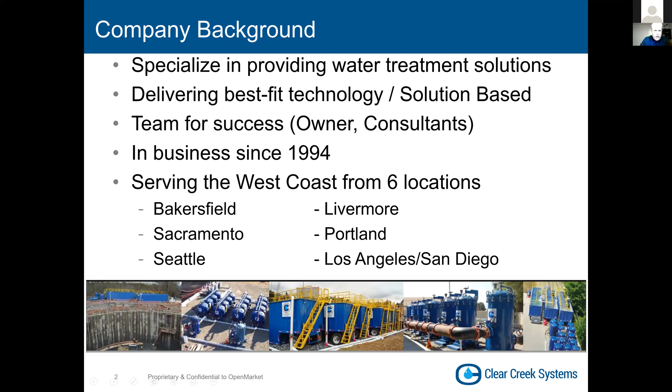One thing that I should say is that when I talk about we, it's not necessarily Clear Creek Systems. When I talk about we during this presentation, it's going to be we as stormwater professionals, okay? So I'll get going. Today's presentation will be focusing on the design and implementation of an industrial stormwater treatment system. It'll be a top-down review of how we as professionals approach these tasks.

We'll touch on the following aspects: how to assess the site, including design and layout of the existing facility and future treatment, identifying any contaminants of concern, and we also will talk about how to treat stormwater efficiently and most economically. We'll talk about how we prove that out through pilot or bench testing. And then finally, I will touch on installation and post-installation considerations. That sound good?

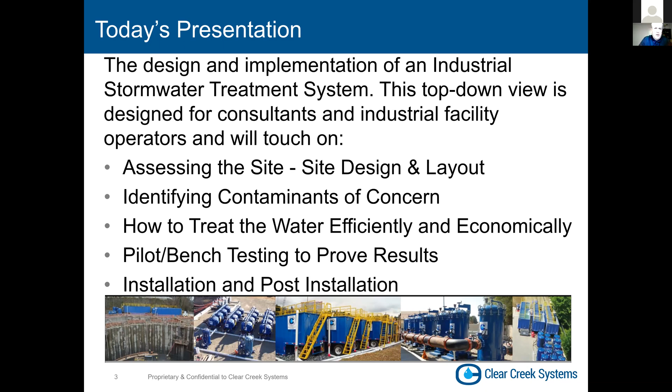So the typical industrial stormwater approach, typical usually means all the time, but every site's going to be different. But they'll consist of the following items. We'll want to meet with the client and their engineer and consultant. Some facilities elect to go it alone, and some have engineers or environmental consultants that assist them through the process. Oftentimes there could be some legal matters involved, and everybody's needs need to be met in that arena.

So once we have the principals, we'll review any site information that we have. We'll take samples, conduct some bench testing, move on to preparing the budget, fabricate and install the equipment if we find that that's an economical way to approach the task. And then we'll also follow up with any support operations that may be needed in the future.

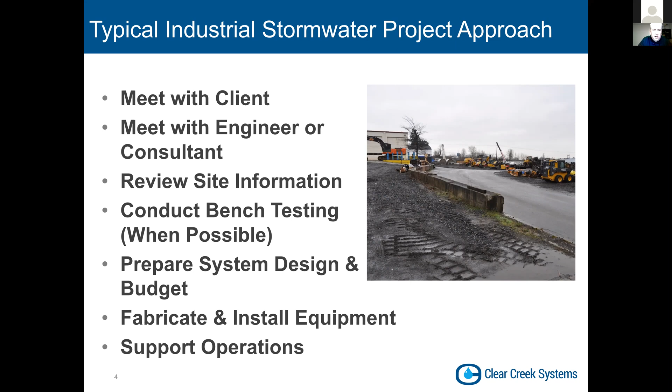Determining the best treatment solution for a facility is a process. There are a number of treatment options available, some less expensive than others. We find that we can arrive at the best approach by conducting the bench and pilot testing, and I'll go into that a little bit later. Follow through with the capital cost and O&M and the best fit technologies. But part of all that is having a good team, and that means our vendors, clients' engineers, their consultants, and facility management is key.

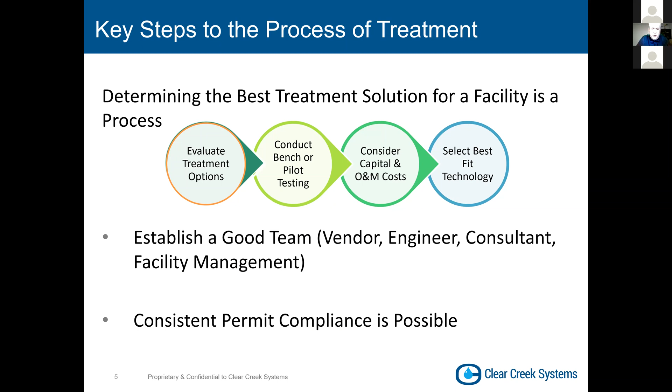We want to know going in, we want everybody to know that consistent permit compliance is possible. It's not something that you hope for. It's something you should be able to depend on.

So the project preparation process will include a site walk, where we go through the site and look at actual conditions, look at housekeeping, how that may be playing a current role. Oftentimes housekeeping has already been picked up by the time we've been called in. BMPs are in place, parking lots are being swept, metal has been put under cover. There's a number of BMPs that can be followed.

So we'll take a look at that, and we'll attempt to capture a sample of the stormwater or simulate a sample with fresh water in a problem area. From there, we'll create a site pollutant portfolio, perform bench testing, analyze percent reductions after our bench tests, and analyze all other obtained information, design and price a system. And I'll be going through each one of these items in the following slides. First, perform site walk, sample capture.

We'll have our technical staff arrive at a facility, meet with the folks there, take that tour, and do an evaluation. We'll look at, again, the existing site conditions, the site pollutant sources. Where's the problem water coming from? And we'll initially look at the feasibility of treatment.

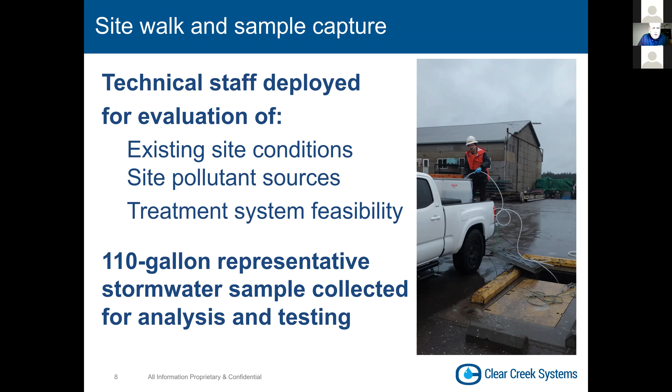Most often, again, we'll try to get 110 gallons worth of representative stormwater. That's like two 55-gallon drums or half a tote. And we'll take that back to our laboratory or a laboratory and do the analysis and testing there. Once we get that laboratory analysis back, we as professionals will create a site pollutant portfolio.

And what we'll be looking at is a whole list of different types of pollutants, and often they're associated with sources. So if we have cloudy water or high turbidity, a lot of times we can look at gravel lots or housekeeping, unswept lots. A lot of things can increase turbidity. We may have issues with pH. That could be affected by a number of different materials.

And then also very, very often we'll see issues with copper and zinc. It's just out there. It's one of those things that a lot of people have to deal with. And then decomposing organic material, anything on site like that, suspended solids. And finally, sometimes there's issues with VOCs and petroleum hydrocarbons and other legacy pollutants.

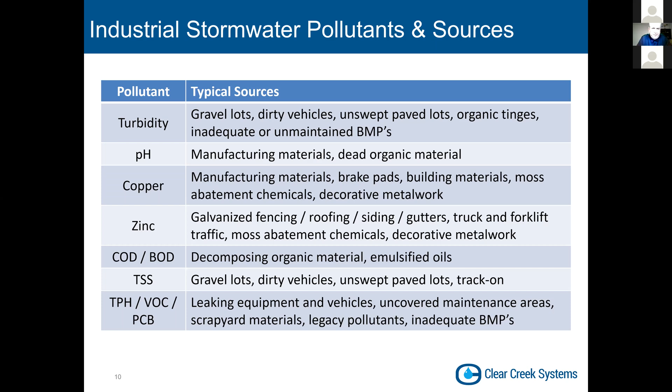So once we complete that task, we're going to have a summary of our pollutants of concern. And when we look at that, we'll be able to put together a unique site portfolio. We'll want to know what are the permitted pollutant levels that we need to stay under, and also what is not permitted. What are you not allowed to discharge from that site?

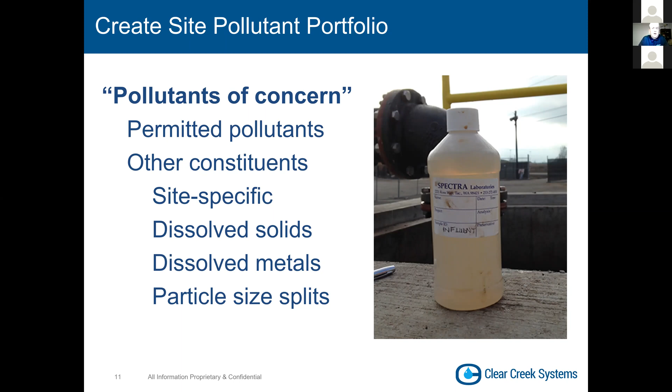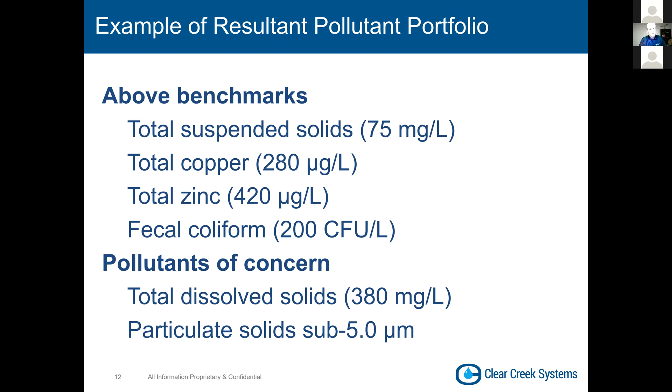This example here with these constituents will kind of follow us through our step-by-step approach. So we'll be able to see how we might treat for these on a theoretical site. Okay. So once we have that together, we'll perform our bench testing. We'll know what the slate of pollutants looks like by now, and we have in the industry some knowledge of how to treat for those. So we'll perform the bench testing and the pilot testing as needed.

Things we'll look to do is remove the solids load. So for any solids in the groundwater or the stormwater, we'll test a mix of mechanical filtration techniques, and that might include sand filters or mixed media filters. We might need to add some chemical treatment and see how that reacts with that particular site's stormwater. Chemical is a scary word, but coagulants and flocculants aren't, so we'll typically use those words instead. I'll talk more about coagulants and flocculants in the coming slides.

Now, often we need to use a combination of the two, both chemical and mechanical filtration. That won't remove everything oftentimes, though, unfortunately, and we need to remove ultrafine and dissolved loading from the stormwater. Usually this is stuff you can't see in the water. You could have reasonably clear water and still have some issues. So if that's the case, we typically will look towards adsorptive media, which can include a number of different medias. Most people are familiar with carbon. We use that to filter our drinking water, for example.

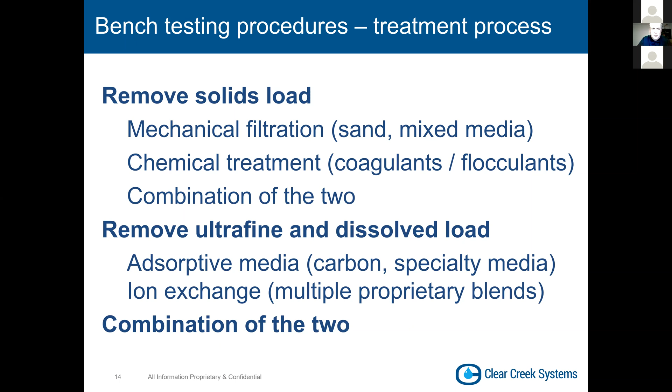We'll take two approaches when we do our bench testing, and folks will usually want to do some qualitative testing. That would include jar testing, where we evaluate chemical treatment and determine the dose rates of any flocculants or coagulants that we might need to add to your system. The qualitative is visual results only. We would be looking for clear water at that point.

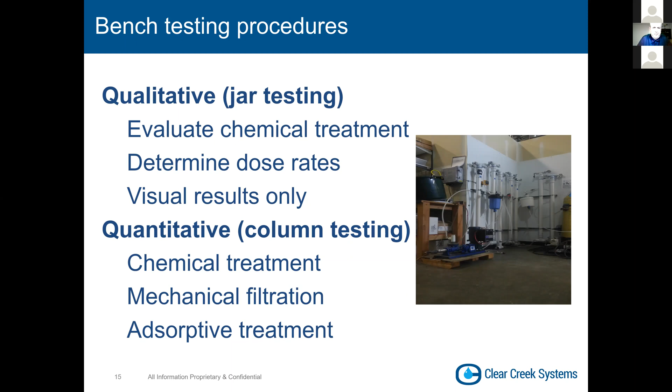And then we'll also do some quantitative column testing, where we actually target the pollutants we know, with solutions for each one of them. That includes things like chemical treatment, mechanical filtration, and adsorptive treatment. Well, we talked about the chemical treatment, and I'm going to start calling it flocculant, or there's different types of flocs. Chitosan might be one of them. There are a number of different polymers that can be used.

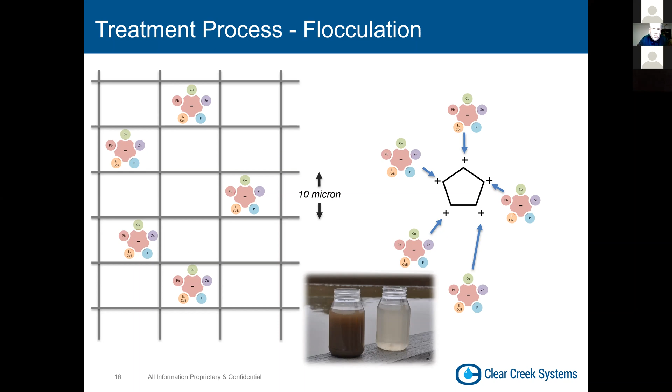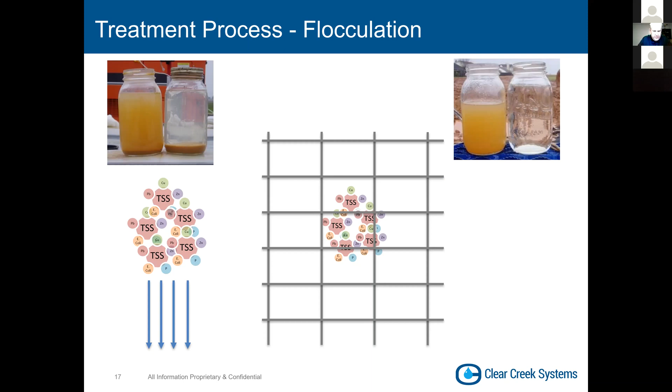Adsorptive media operates a lot differently, actually. The adsorbent media attracts particles as well, but it uses a lot of different forces, van der Waals, capillary action. There's multiple different ways it works, but basically they pull in the particular particles, and they stick to the media or get absorbed into the media, and do not continue on in the process train.

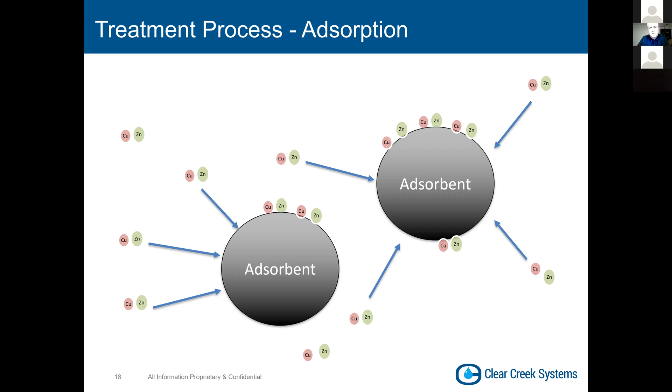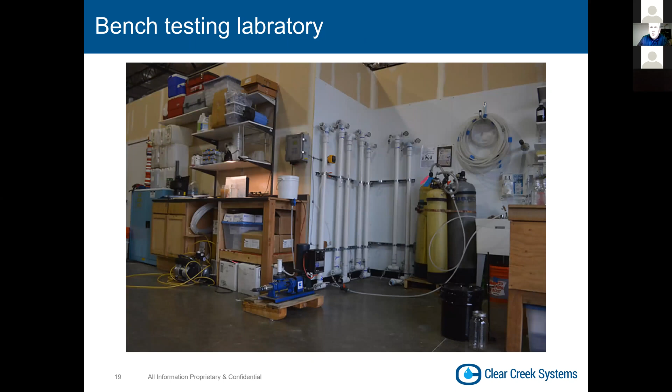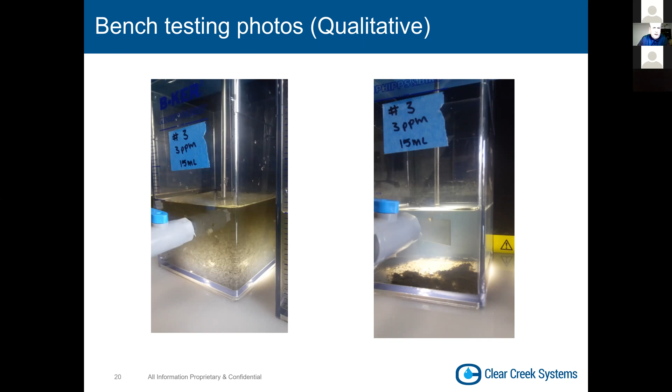So once we finish all that up, we will want to analyze how well we did. This is good data for consultants and anybody concerned with how the actual site might react with a treatment system. In this case, you'll want to look at the sample ID raw. That's your raw water samples, what we've collected at our site. In this case, there might be some chitosan enhanced sand filtration. That's the flocculant with a sand filter. We can immediately see some reduction in copper, total lead, some zinc, suspended solids, and the coliform.

Now, what's good about that is that you're getting a big hit for the least amount of money. So this site looks pretty good as a candidate for sand filtration with some flocculant. In this case, we had two more lines under that, AM1 and AM2. For our purposes today, we'll consider that adsorptive media number 1 and another selection, adsorptive media number 2. We see that it didn't really have any effect on pH, although it did increase a little bit. Nothing on the NTUs. But we did see some results with AM2 for the copper, and zinc was really good reduction there.

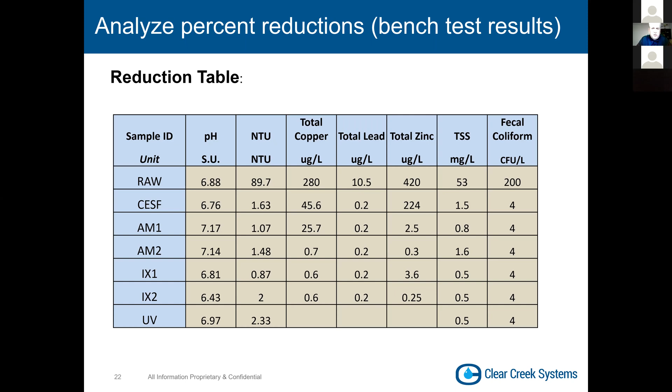So that's just an example of what you might look at after a bench test. We should be able to make some decisions on what we would recommend as professionals to the client on a way to proceed. What's great about this type of thing is that it's defensible, it's repeatable, and oftentimes a third-party laboratory will do the final testing to check these levels. So very pro. So this is just a summary of that sheet.

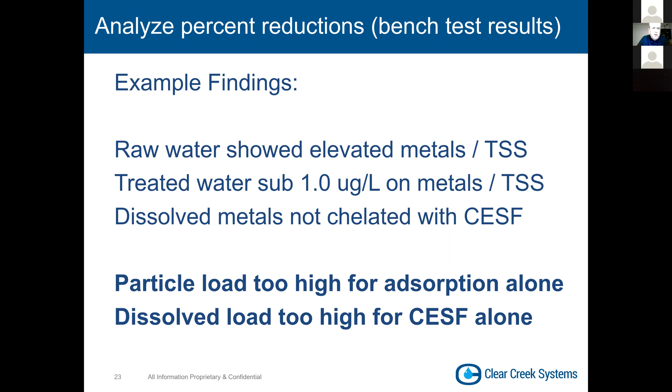We'll be able to draw conclusions based on particulars. And in this case, or well, our example anyway, the particle load was too high for adsorption alone, which means it was dirty water, and dissolved load too high for CESF alone. So I remember I talked about sometimes you need to use a combination of both technologies. This is one of those cases. All right.

Finally, we'll analyze other information we obtained from the facility, and this helps us put together the final plan that we will approach our clients with, along with consultants or engineers if they're part of it. But we want to look at outfalls. We want to know where that water is coming from. Is there drainage off the back end of the site, or coming in from your neighbors? We want to make sure that we're not treating somebody else's stormwater that's running on. The fertilizer plant next door can mess things up. So we'll be looking at things like that and site characteristics.

We'll want to know where this water's going. Is it going right to the gutter? Do we have access to a storm drain? What's going on? We'll look at other things like the dissolved solids and the fecal coliform. Where's that coming from? Can we clean that up? Why are the filters not able to work on this site? Is it because people are driving on them all day long and just pulverizing dirt and gravel?

And lastly, but not least, you want to look at any other characteristics. Is there a new permit being issued by the permitting agency? We want to future-proof our solutions. A customer is going to spend a lot of money potentially on fixing this problem. They don't need to come back 2 or 3 years later and spend more money because somebody decided to enforce some other Clean Water Act or whatever might get changed as time goes on. So a point I would like to make is that the best solution is able to last.

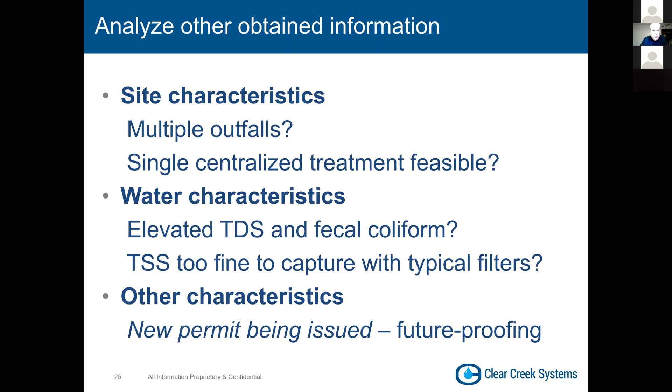Finally, we'll want to design and price out the system. Now, the design's fun, the price isn't always fun. So how we do that, we want to determine the flow rates of the individual drainage basins if there's multiple flows coming. Often that is a direct correlation to site acreage and rainstorm events. So through tables, we can identify a design capability in terms of flow rates. Can we have a centralized treatment system? That means, is this site so big that we cannot combine flows into a single flow? Do we need to have 2 systems?

So sometimes we'll have a facility that spans across a city street. So they have operations on one side of the street, operations on another side of the street. Might need 2 systems. Maybe they can centralize the collection. So we'll talk about that. We'll determine what chemical treatment will best work if needed. That could be chitosan in our previous example. Determine adsorptive media if needed. And that's going to be a mix of organoclay and carbon in our example.

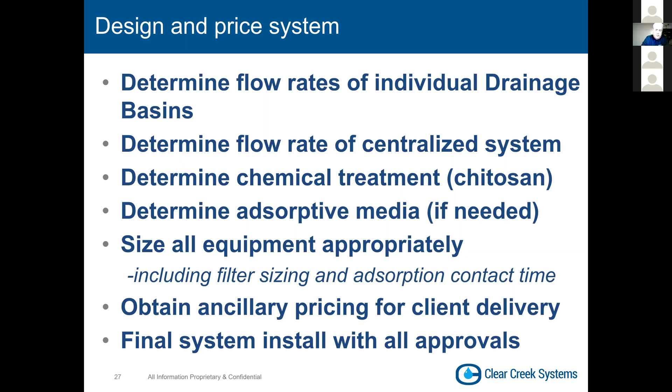And then finally, once all that is approved, there's definitely going to be some additional work done when the system goes in, and so that's what we'd be working towards.

In our example that I'm using today, things that we would probably consider or need to look at: can we use the existing detention basin or stormwater vaults for storage? How much volume is in there? It counts. Need to know. More storage, the less treatment, or the lower treatment volume we'll have to have.

We'll need to pump from the vaults to the centralized treatment, so pumps, and then we'll have to have some conveyance piping. If we have pumps, we'll have to have electrical run over to where the pump is. Can't have trucks running over extension cords, so a lot of times there's some trenching involved.

We'll look at other things, like in this case, we'll have our chitosan pre-treatment ahead of a storage, so we can get some settling. And then from storage through the sand filter, some conveyance piping. And then finally, the adsorption after the sand filter. We saw that work in our example. And then finally, we want a direct discharge to our designated area.

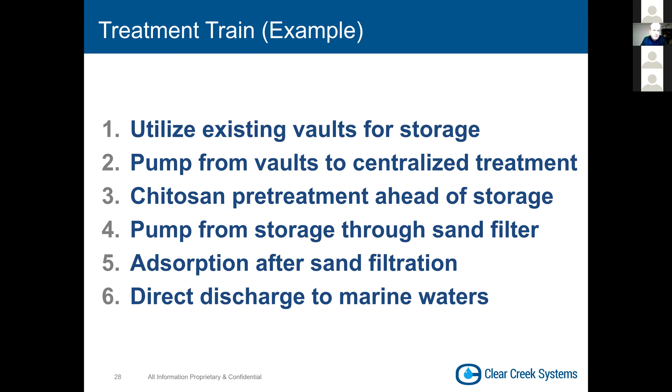Maybe this looks a little bit easier to read, but we'll see our vaults, stormwater vaults or detention basins, pre-treatment with our flocculant. That's that chemical treatment I spoke about. Need some reaction time. It might take several minutes or even more sometimes for the sediments to drop out and clump together. And that needs to be designed in. Finally, that mechanical filtration, that could be the sand filter, and then the adsorptive media, and finally discharge. So that's what it looks like in a line drawing.

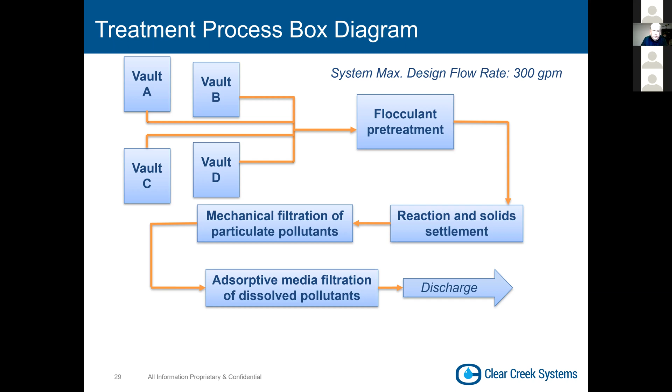You should be able to adapt the footprint to fit in corners or in certain areas. There's no hard and fast footprint requirement, but it needs to be considered as we install. Often we'd like to see everything on a nice pad as well.

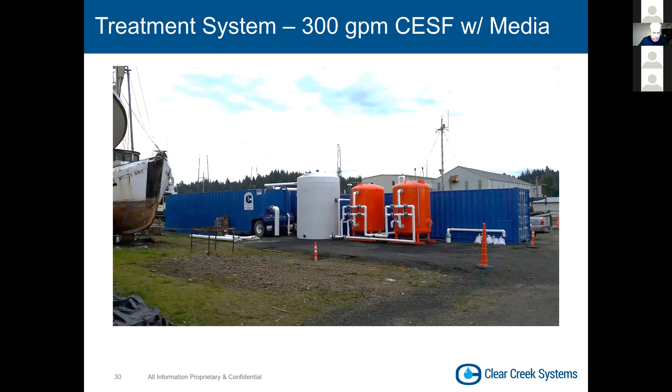Just some additional thoughts as a summary here. So we want to reduce the TSS load, reduce any dissolved metals. We chose a technology in this case because hardness wasn't a problem. We were able to get a small footprint in because we just had a single treatment point, which also results in the lower cost. We feel that based on our bench tests and all the data we've collected, that it's robust, and we've been able to prove the proof of concept through our bench testing.

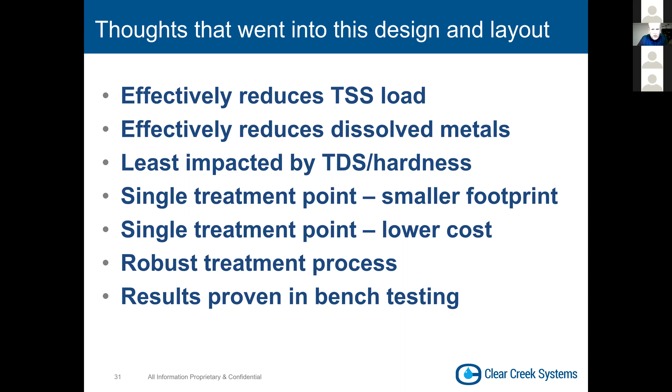So, a couple looks at what that particular system might look like in terms of capital costs. 2016, which seems like forever ago now, just yesterday for me in a way. But prices have gone up since 2016. But back then, what you just saw, these are the numbers.

One thing that needs to be considered is ongoing operation and maintenance. These things are not refrigerators. They do need to be checked on during the stormwater season. The client needs to consider whether they want to train a team to do that themselves, or have a consultant technician do it, or have the equipment provider potentially do that as well. These are all things that need to be determined.

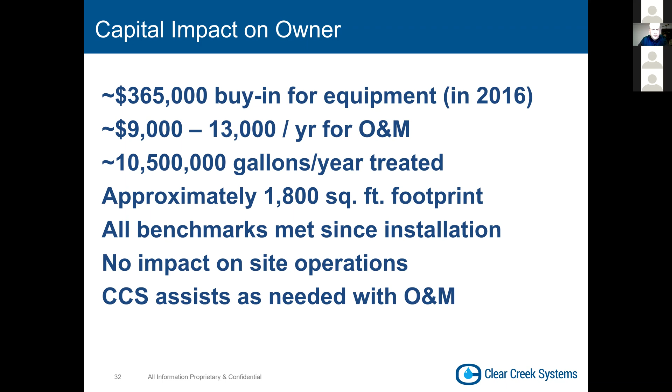And in summary here, thanks everybody for sticking with me. Each facility has their very unique challenges. There's no cookie cutter approach to this. Consider the client, if you're a consultant or engineer, and regulatory needs, obviously. Assess the site, design and layout from A to Z. Identify the contaminants of concern. Figure out how to treat the water efficiently and economically.

You don't need the most expensive option. Pilot test, bench test those results. Consider installation and post-installation. How's that look? It includes operations and maintenance and ongoing needs, and what that all costs. It all comes with a number.

Does anybody have any questions at the moment? Just unmute yourself if you can.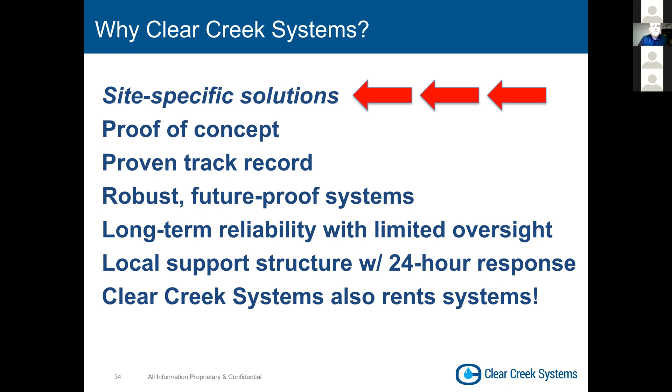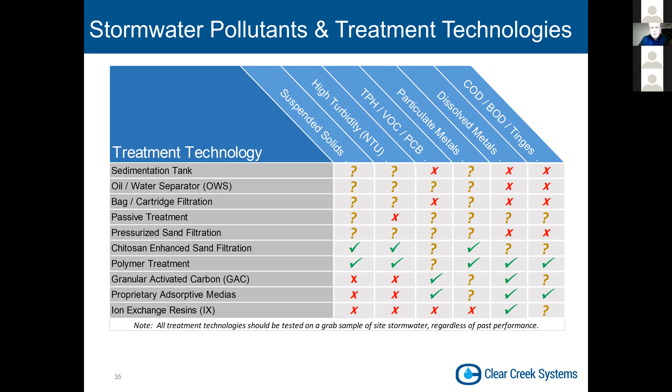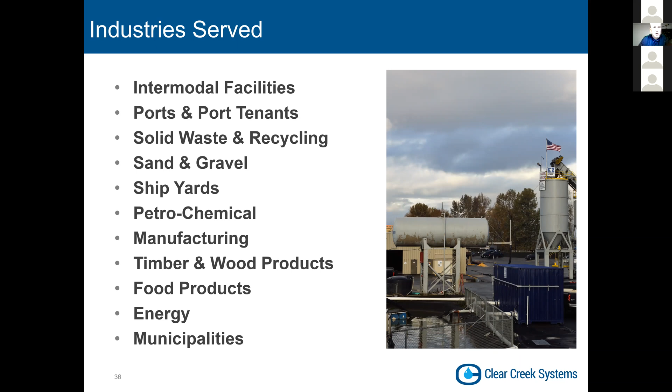Variety of industries. Industrial stormwater just encompasses a lot of different areas. These are just some of them, a general list: shipyards, anyone dealing with sand or gravel, petroleum, chemical companies. Oftentimes there's some remediation that goes into that. Timber and wood facilities. These are all areas where we concentrate, and probably everybody on this call is familiar with at least one or more of these areas.

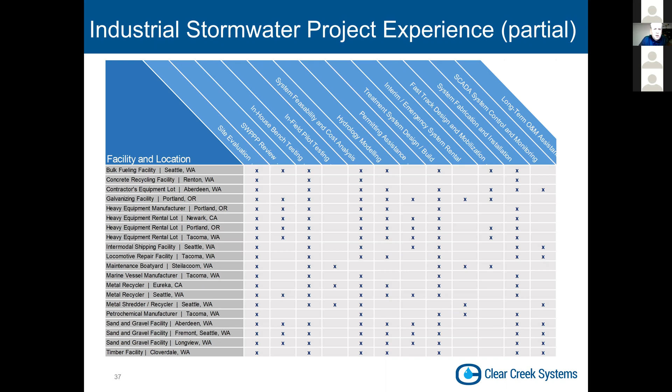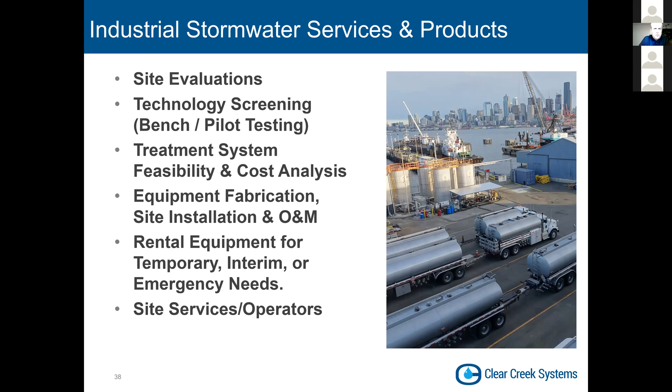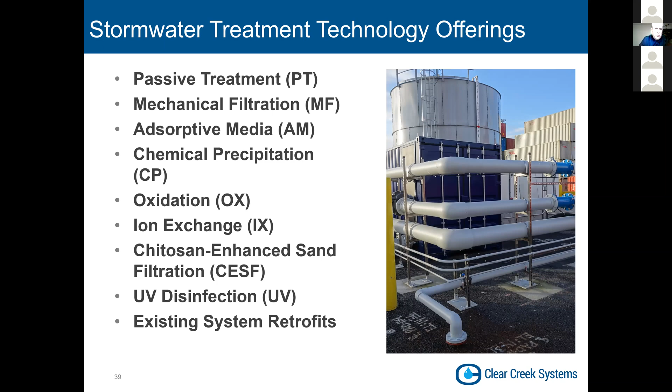Almost done. Everything we talked about already is what we do. We're not the only company that does this. I would say that most companies that provide stormwater treatment systems will do all these types of things, us included. And again, just our different technologies. This is not an exhaustive list, but I just want to give you all an idea of what people look at for some pretty exotic treatment.